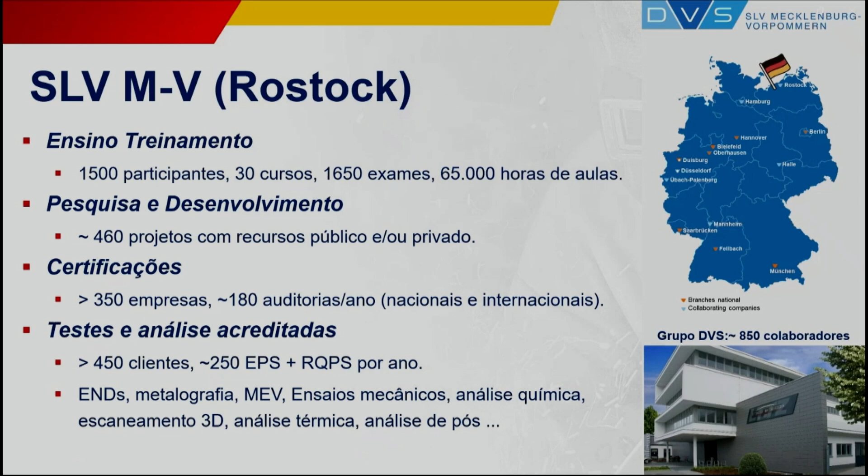So if we're looking at the different business fields, as I mentioned, we have the quality assurance, where the testing laboratories and construction supervision is integrated. We have the education and research and development, and also some other smaller parts.

If we look at the quality assurance, one of our biggest projects in this field was the complete third-party inspection for EnBW Baltic 2. It's a large offshore wind park located here in the Baltic Sea. There we did the complete third-party inspection at different construction sites. At the peak, it was about 10 construction sites across Europe, where we were involved over 4 years in the construction of 80 foundation structures, roughly 40 jackets, and also 40 monopiles for these offshore wind energy systems.

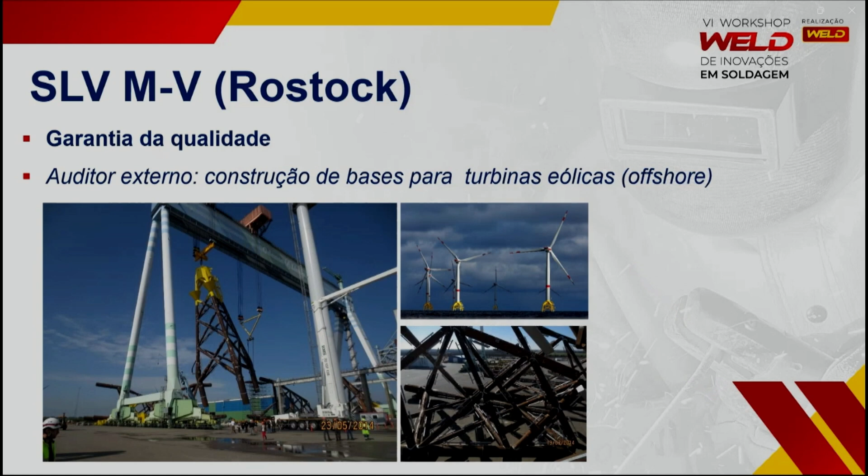Within the materials testing department, we are dealing with destructive and non-destructive testing facilities, like the sample preparation here for polishing and so on, and also for EDM and raster scanning electronic microscopes. Also for preparation, we have different systems here: wire EDM, surface grinder, mobile spectrometer, high temperature oven for different testing, but also systems for dynamic and static testing of the samples.

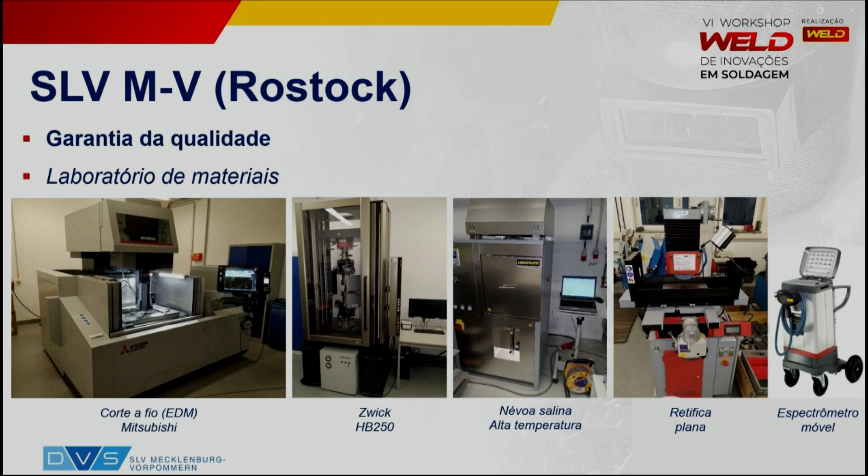The research and development is a relatively large part in our facility. It makes about 30% of the revenue, as it's a little bit special within the group of all the very similar SLVs here in Germany, because we have the highest part of research in our revenue, which is 25 to 35%, and we are dealing mainly with laser sources and with laser processes.

That department's philosophy is a customer-focused research service provider. This means the different research topics we deal with: public-funded research and development, contract research as a shortcut for customers if they don't want to apply for public funding, for example, and during the field or during the period after the development of a process or a system or an automation system or production line till the installation and set operation of the production line, we can do also services, and this means mainly small series production.

Our current research activities are dealing with laser welding, as we can see here on top, for large and thick plates, up to at the moment 80 millimeters. We are doing laser welding, but also manual laser welding of up to several millimeters.

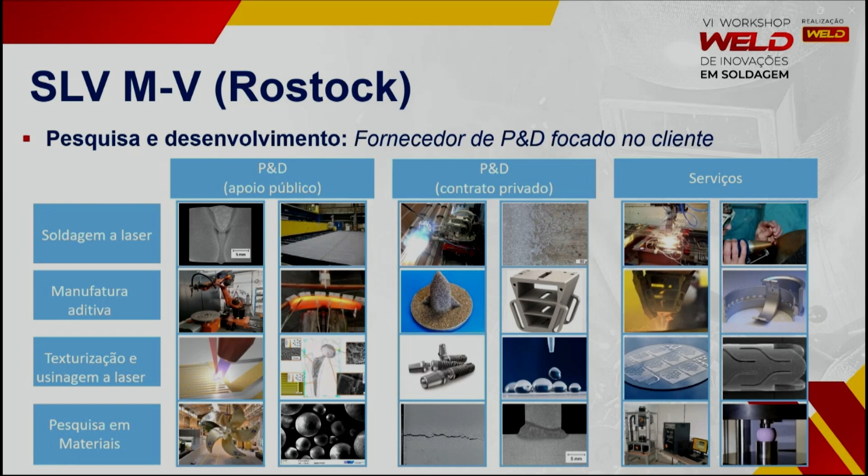Materials research is more like a broad base for all the other topics, because if you don't understand the material and if you don't understand what the material is doing during the heating and the cooling and so on, you don't understand where the problems come from. So that's why a lot of materials research is done in the background to understand all the processes we develop in the other three parts.

In principle, we understand ourselves as a service provider, as I mentioned, and we are doing the whole chain from the preliminary test to set in operation.

Here with two examples, with two shipbuilding machines where we developed the laser hybrid process, or the laser welding process, or in that case here on the left side was 2 layers laser hybrid welding, which we developed for European shipyards, and together with a partner, IMG here, also a company located in Rostock, we developed the laser process. The company IMG installs a panel line, length of about 350 meters and 60 meter width.

We also do the training, or did the training for the operators, safety issues and all the things, and also were on place or on site when the system was set into operation, and together with the classification rules and the classification societies, we also did the set in operation, so that you only have one partner for the whole chain.

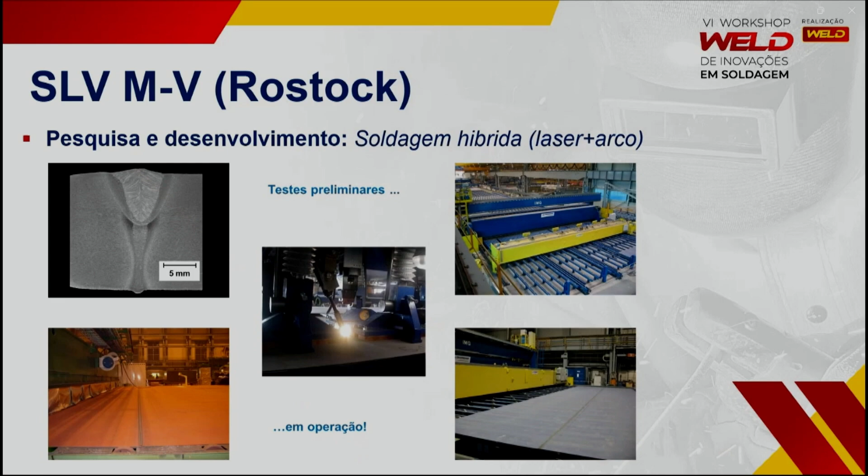And with this example, we are doing this, let's say, 3 to 4 times a year, not only in this dimension with 300 meters shipbuilding area, but also in smaller dimensions for automotive industry, aerospace industry, and of course also medical technology.

Here's a short overview of what we are doing, and our examples also for our customers.

There are some regional partners, companies like Webasto, EW, MMG, Propeller Building, so a lot of shipbuilding industry, a lot of automotive industry, but also for mobile cranes and so on. Internationally, we are working with a lot of companies across Europe, mainly in the western part, but also with companies in Russia, the Baltic States, Central Asia, and South America, mainly Brazil.

Our current fields of interest in research and development are shown here. For example, laser welding of steel, or laser hybrid welding of steel, in that case for shipbuilding, with very long welding seams up to 16, 20, 30 meters, and material thicknesses of up to 30 millimeters. Here is an example of laser hybrid welding in a single pass of up to 25 millimeter steel.

That's an A36 or E36 shipbuilding steel, comparable to S355. In that case, with a welding speed of 1.5 meters per minute, with just one run. That was several years ago, and currently we are driving these applications and processes towards higher thicknesses.

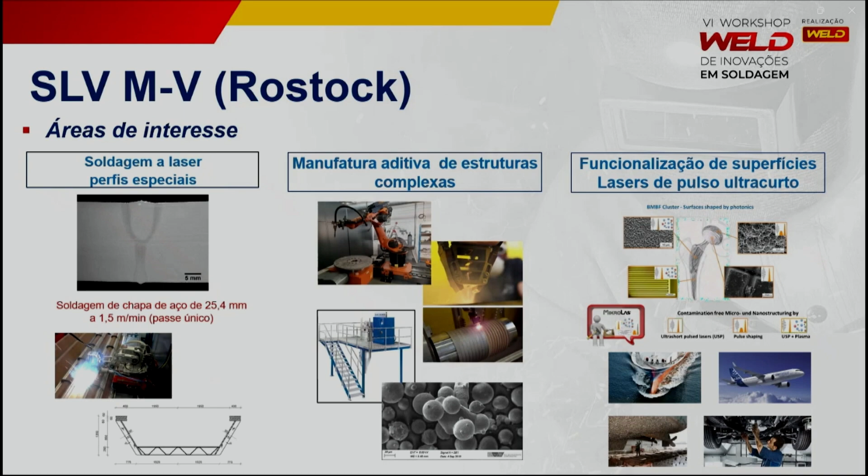Last but not least, the third big department topic is surface functionalization using ultra-short laser pulses. There we have application mainly in aerospace, but also in the shipbuilding industry, for example chemical-free anti-fouling systems, and in the automotive industry, where we produce a lot of electronic devices, especially for e-mobility.

As I mentioned, we now have two of these non-standard industrial additive manufacturing systems, one installed in 2018. In the meantime there is a second one of this type, nearly the same robot, where we can produce different parts within a volume of 6 by 3 by 2 meters.

For example, here we can weld and also do laser hybrid welding or cutting for mobile cranes, high-strength steels, but also produce very large parts of more than 1.5 tons printed directly out of the system, made by arc wire generative production or additive manufacturing, but also with laser wire and laser powder.

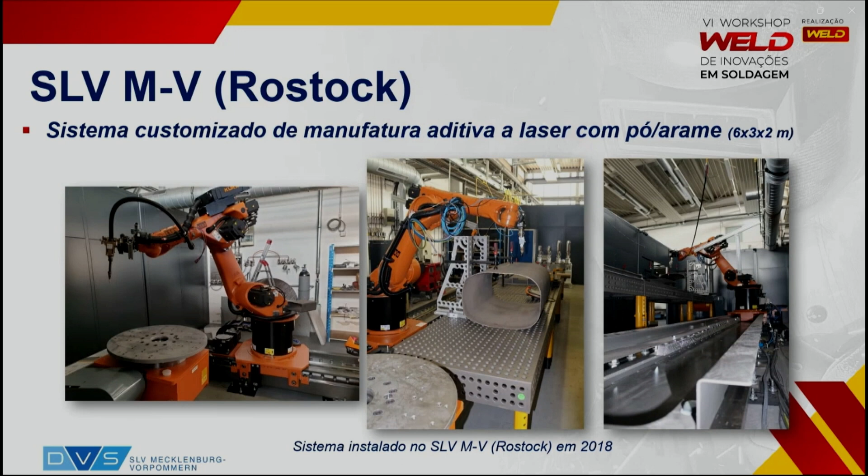So we have all the topics here and all the machines on site.

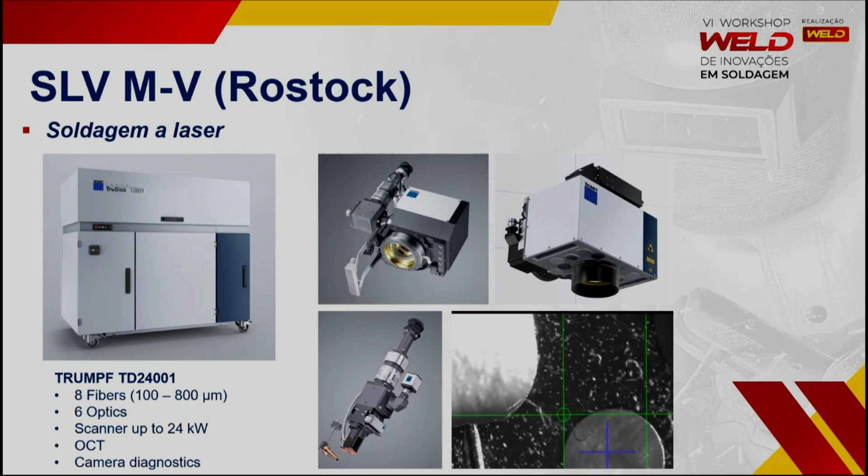For the laser welding itself, we are using mainly solid-state lasers. For example, one of our systems is a 24 kilowatt system with 8 different fibers, a scanner up to 24 kilowatts, optical coherence tomography, diagnostics, and so on. With this, as I mentioned, we can weld up to 80 millimeters with one run at the moment, but also with very high speeds for applications in the automotive industry, cast aluminum, for example, where we weld structures of less than 2 millimeters in thickness with speeds up to 30 meters per minute welding speed.

Also for powder fusion, we have different systems here, starting from infrared lasers for stainless steel, aluminum, but also with a green laser for pure copper and copper alloys. And the largest system we have has a 200 millimeter diameter building platform, or base plate, where we can produce even larger systems. Depending on the machine and the application, we are using this for different applications in our house.

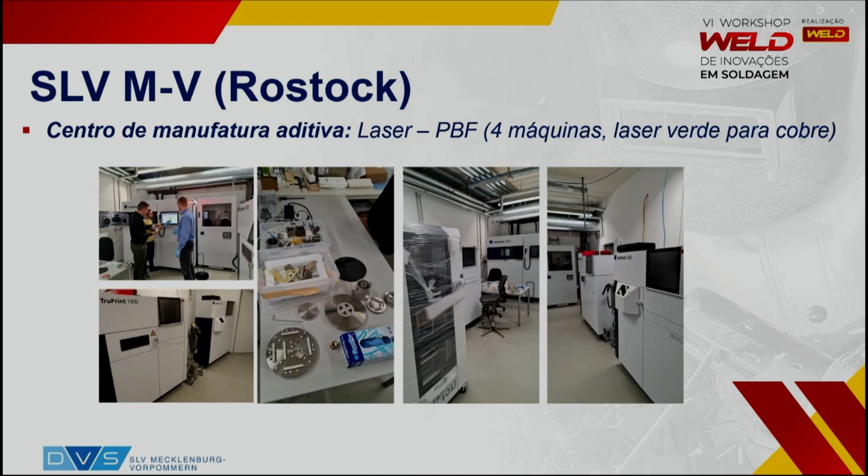So if we switch again to DED, laser powder or laser wire, we have different KUKA systems here, coax printer for wire, for precision, and also, of course, for laser hybrid welding, then different laser sources and also arc sources, like here from the Fronius system, the TPS600i.

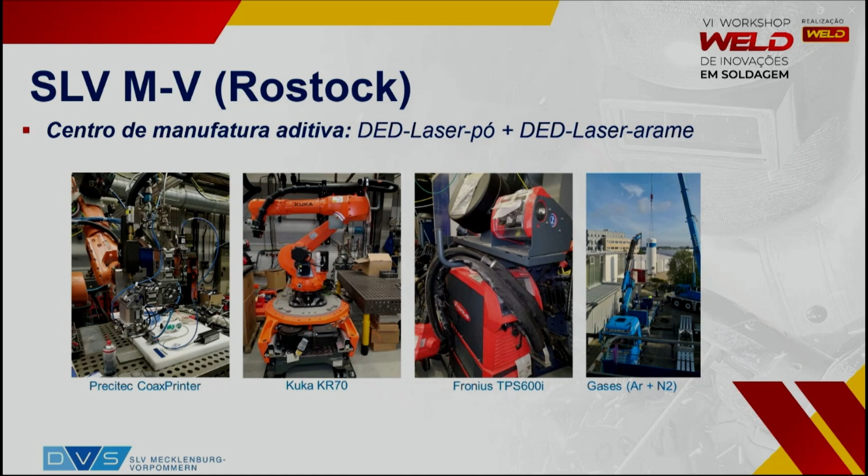Cooperation partners, as I mentioned, are located very close to us in Mecklenburg-Pomerania and northern Germany, but also in further parts of Europe. So if we look for education, that is the next step.

As I mentioned, we have about 1,500 participants per year. The main part of the participants is coming from the practical education in Germany, and in the northern Germany part here we have the market within Mecklenburg-Pomerania. We are doing the practical education within our state, and we do about 70% of the practical training of welders here in Mecklenburg-Pomerania.

Of course, we also have to look for the next generation, and here we are doing an international challenge for the younger welders when they start with welding and their education. This is the so-called Jugendschweissen, the young welders competition, and we have been doing this for decades in our institute, doing this for the country.

In theoretical education and training, we are doing mainly international welding engineers, technicians, and specialists. Here are shown some courses we are doing in Rostock in front of our facilities.

During the pandemic, we learned a lot about how to train and reduce the presence parts, and we are doing this in a hybrid way. Today with presence parts and also the digital classroom to reduce the efforts for traveling and so on, we are doing 2 of these courses per year in Rostock, and also 2 of the courses for welding specialists.

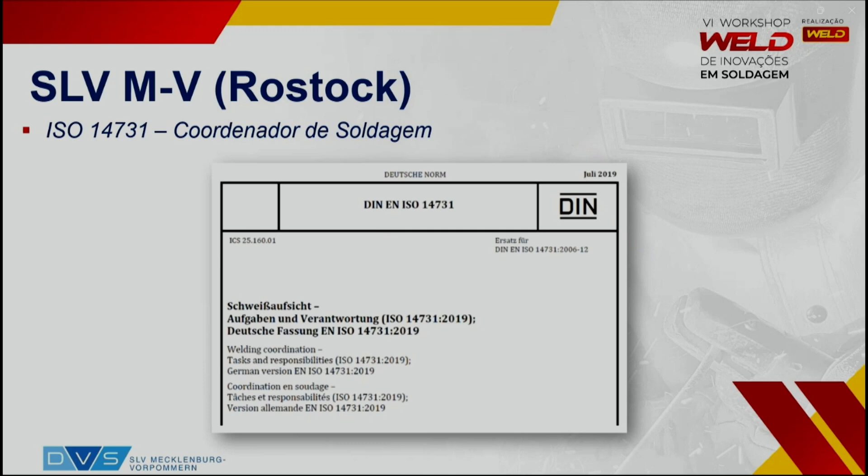Why is it so? Because 14731, together with ISO 3834, which is a standard dealing with quality management in welding, has an informative appendix. Within that appendix it is clearly stated that depending on the product and the level of the product you want to produce, you have to have certain specifications and qualifications for the persons doing and supervising all the work.

So especially the quality requirements for fusion welding of metallic materials, and conformity to those quality requirements, are included in this rule. And within this rule, it is clearly written that you have to have a certain level.

One way to fulfill this certain level is, for example in Germany and also in Northern Europe and in Asia, to have a qualification and certification after the IIW standards, shown here on the right side, for international welding engineer, welding technician, and welding specialist.

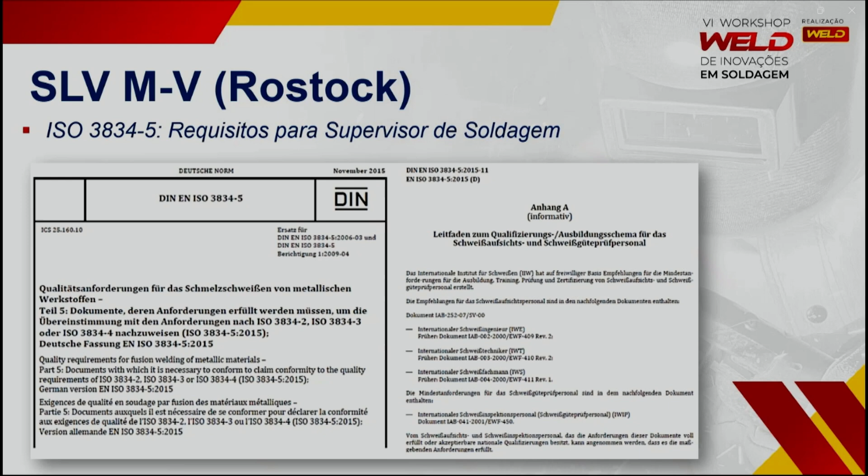It's written within the IAB 252, depending on the year. The scope is different, but in principle these qualifications are enough to fulfill the needs of the 3834.

If you look at the International Institute of Welding, it's an intercontinental, worldwide system and society. Many national welding societies are members, and within the IIW there are two boards: the technical board and the board for authorization, the International Authorization Board, the IAB.

The IAB deals with qualification systems. We won't look too much into certification detail today, but the qualification system within the IIW is very strict and harmonized. In fact, the IAB rules, which deal with the education for these different qualifications, and guidelines are harmonized worldwide.

If you look at the system itself, similar to the IIW, the DVS system we work with has at the top of the pyramid the DVS International Welding Engineer, according to IAB 252—so an international welding engineer.

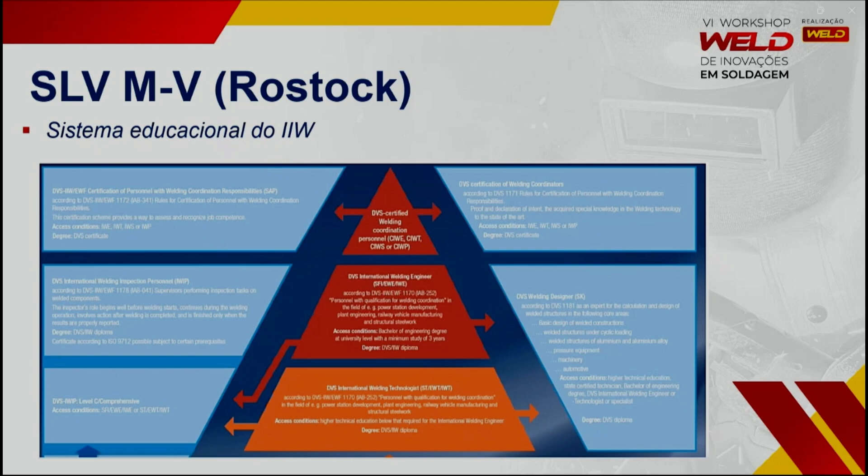This International Authorization Board, the IAB, within guideline IAB 252, explains and develops all the content, and depending on the level—engineer, technologist, or specialist—you have different EQF levels. It's a standardized qualification level with different teaching hours.

For example, there are 448 teaching hours for the engineer and about 189 teaching hours for the welding specialist, plus a lot of additional workload for learning at home—so roughly doubled as an overview. Depending on this level and the diploma you have, you can produce or develop different products and are allowed to implement these products into certain markets.

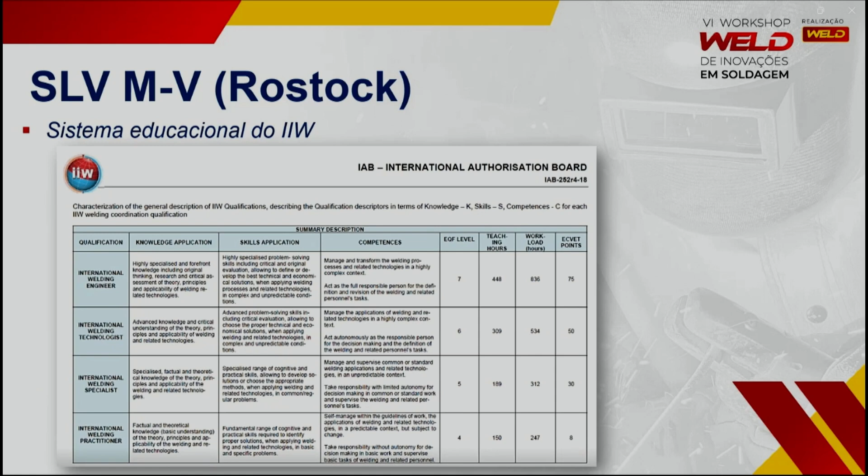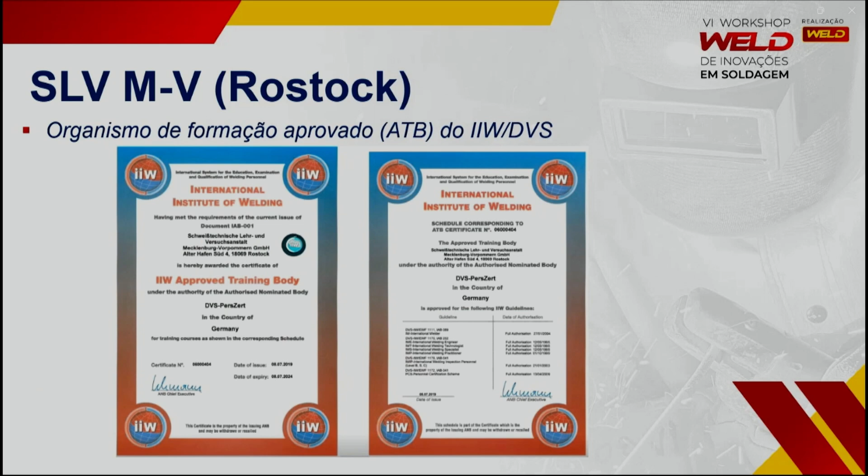We as the Welding Training Institute here in Rostock have to be approved, and we are an approved training body by the DVS system here in Germany, and DVS itself is approved by the IIW. This means we are allowed to do international education as an ATB, an approved training body, within the DVS system and the IIW system. And within the system, we have the full scope for every IIW level concerning welding, from engineer to specialist and practitioner.

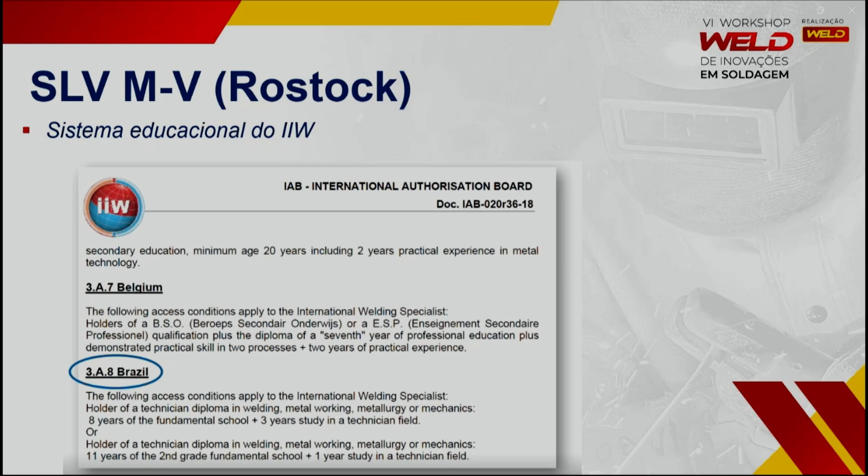Of course, you have to fulfill certain minimum requirements to be allowed to take part in the course and to do the examination at the end. There is a special rule and guideline for the minimum requirements for the different levels, and within these, IAB 020 is the name. It also specifies, for example for different countries including Brazil, what you have to fulfill to do this certain education. The education itself is divided into different parts.

The first part is always the theoretical part, covering basics, followed by a midterm exam for part one. Then you have practical lessons, between one and two weeks depending on the level. Practical training is also for the engineers, so that at the end they understand what their practitioners or welders are doing. Then the main part is part three, theoretical education, which goes much deeper into structures, mechanical points, welding processes, materials, and so on. Finally, at the end, you have the final exams, written and oral, for the different modules, and at the end you get your diploma and certificate.

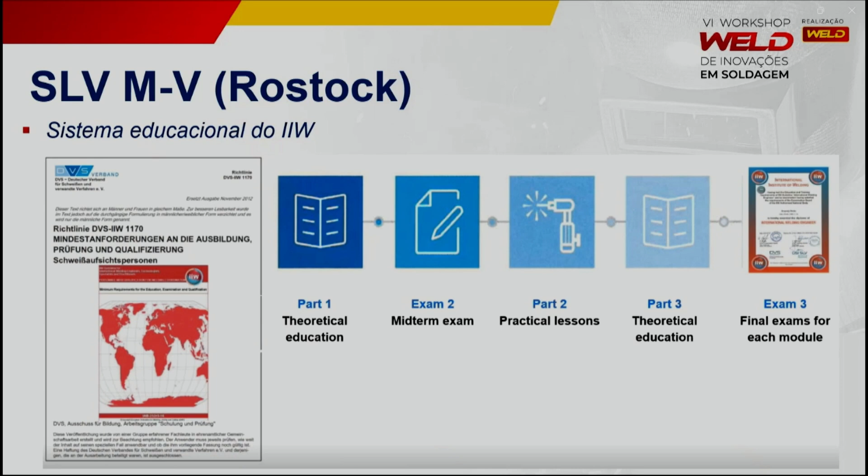With this, I would come to the conclusion. As I mentioned, we are a research and education institute. We deal with research mainly on laser processes in that case, and are always open to requests and further discussion on different topics. Besides this, especially within Sao Paulo and Brazil, we are doing the education of welding supervision personnel, especially for international welding engineers and welding specialists. We are really happy to present our institute today, and we are open for discussion and would be happy to get questions from the audience.

Thanks a lot for your attention, and feel free to ask my colleagues, especially Carla Bartzelewski, who is also here today and open for questions, also in Portuguese. And of course my colleagues Mrs. Meisner and also Professor Luis Jimenez, for further questions on site. And if you have any questions about research and development or laser processes, you can always just ask me directly at peters@Rostock.de. We would be really happy to answer your questions.